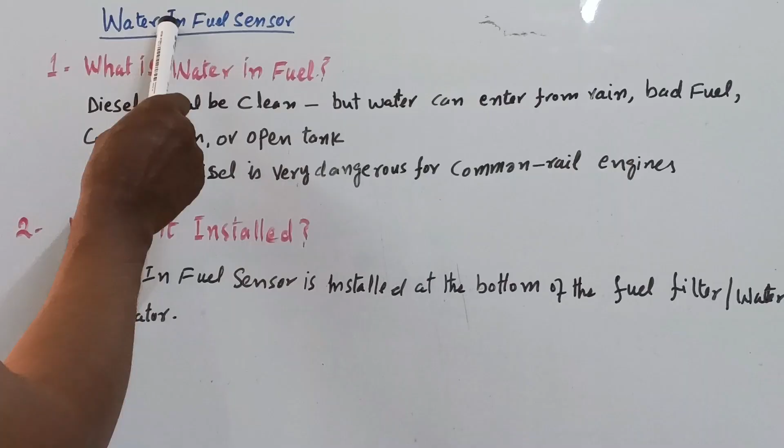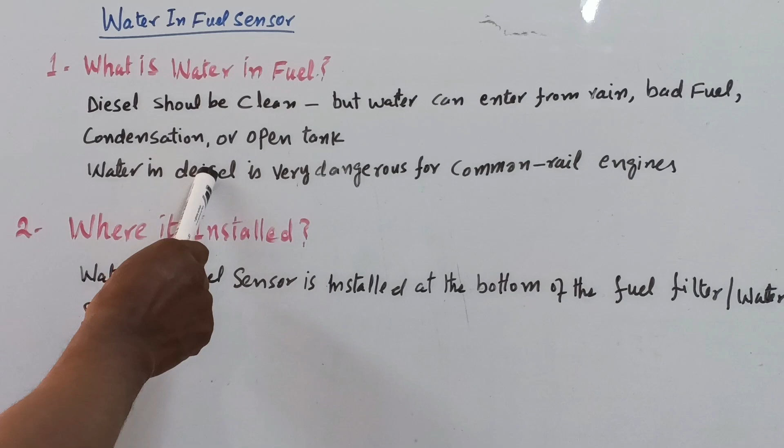So let's start. First we talk about the water in fuel sensor. So first point is what is water in fuel? Diesel should be clean, but water can enter from rain, bad fuel, condensation, or an open tank. Water in diesel is very dangerous for common rail engines.

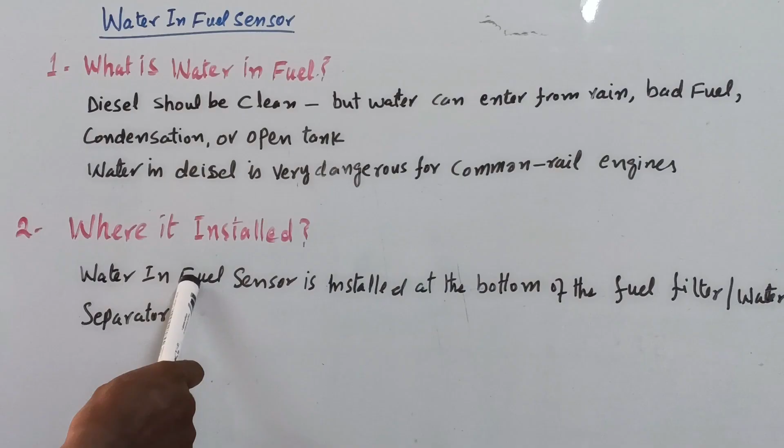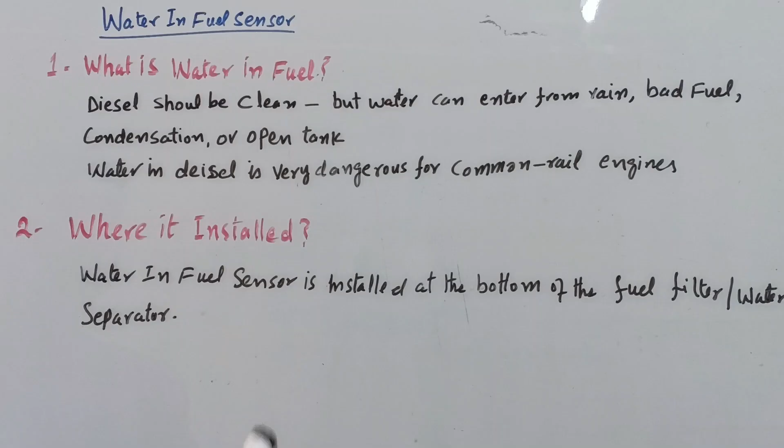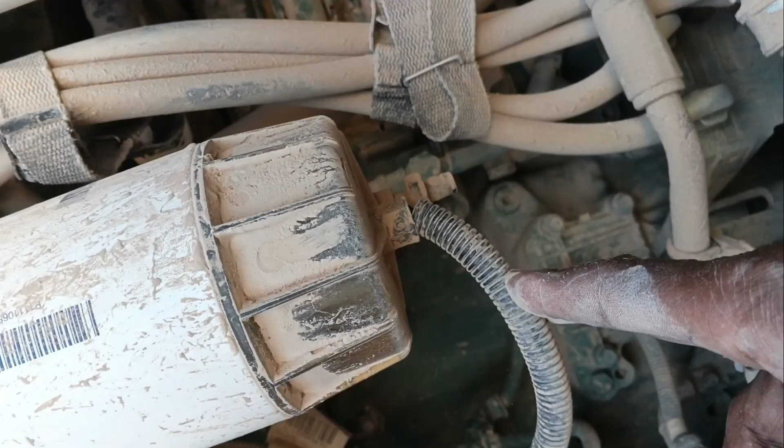Point 2. Where is the water in fuel sensor installed? The water in fuel sensor is installed at the bottom of the fuel filter or water separator. I'll show you physically on the machine where in the Volvo loader this sensor is installed. So here you can see this is our diesel filter, under this diesel filter is a water separator, and in the water separator our water in fuel sensor is installed.

Point 3. How does this sensor work? Diesel does not conduct electricity, water does conduct electricity. Therefore, when water reaches the sensor probes, the circuit is completed, the ECM detects it and the warning light comes on. So in this way, this sensor works.

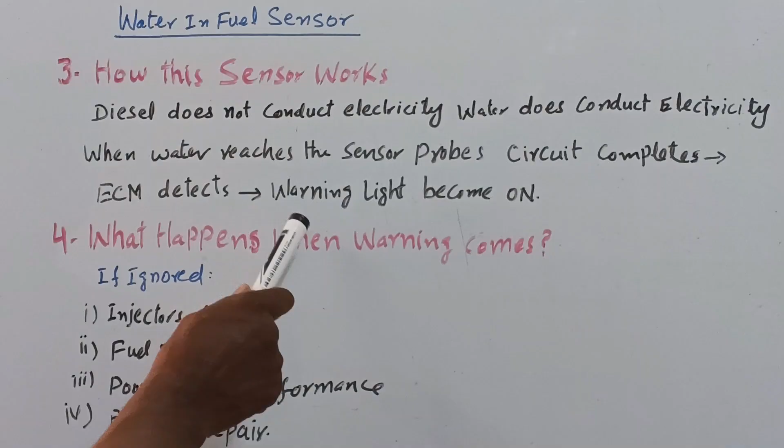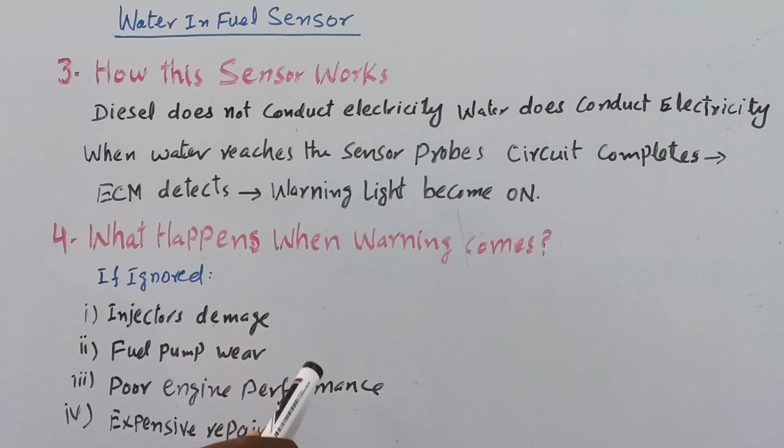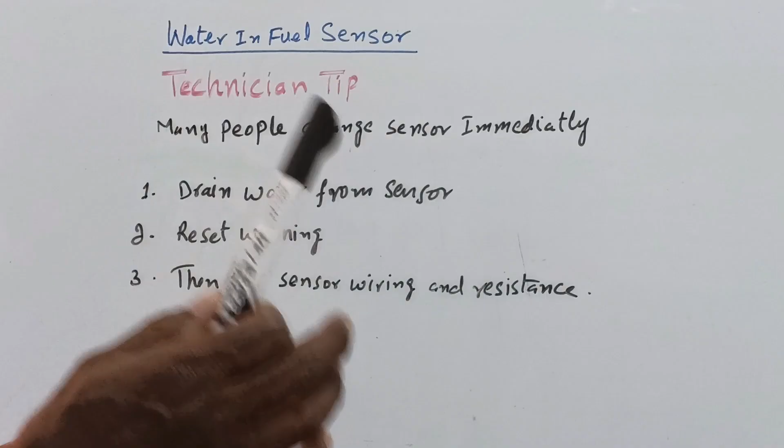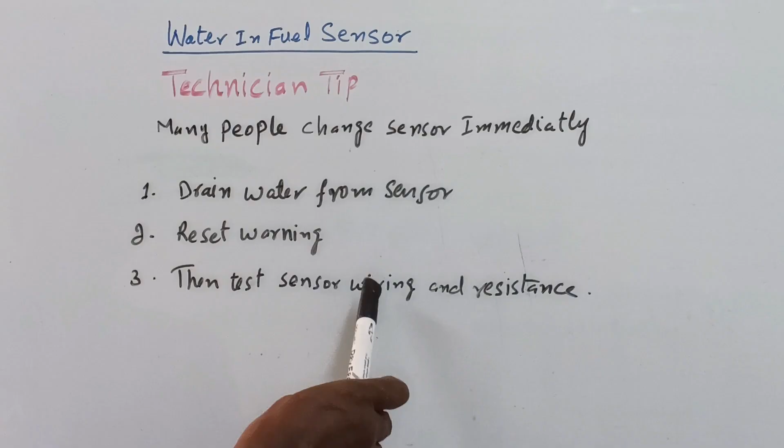Point 4, what happens when the warning light comes on and we ignore it? Number 1, injectors can be damaged, the fuel pump can wear, poor engine performance, and number 4, expensive repair. And at the last, a technician tip. Many people change the sensor immediately, but don't do this. First, you have to drain the water from the sensor, then reset the warning. If the warning is not resetting, then test the sensor wiring and the resistance.

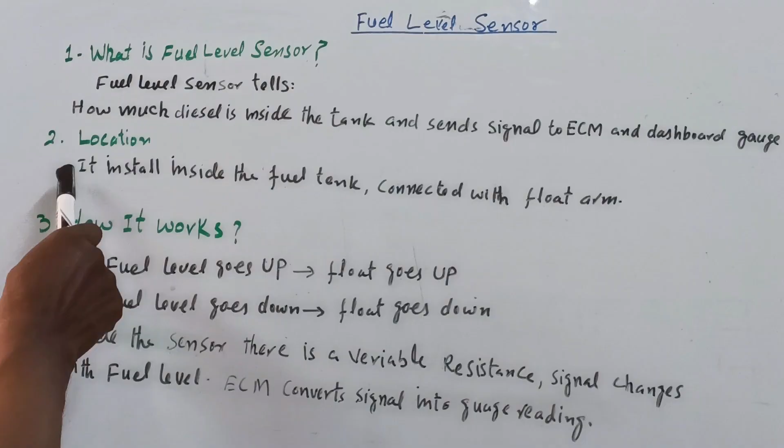So viewers, now we will talk about the fuel level sensor. So first, what is a fuel level sensor? The fuel level sensor tells how much diesel is inside the tank and sends a signal to the ECM and dashboard gauge. Number 2, the location where it is installed. It is installed inside the fuel tank, connected with the float arm.

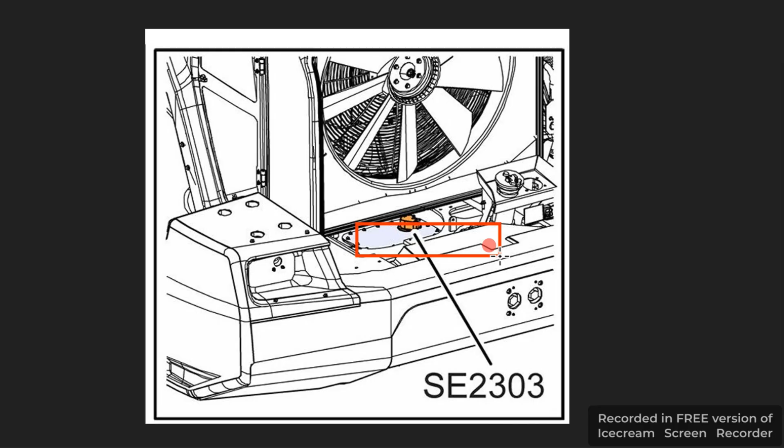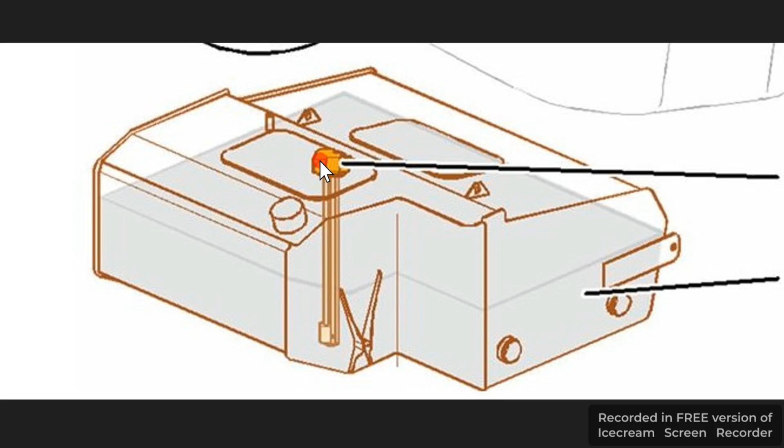I'll show you on the machine where this sensor is installed. So here you can see this is my machine, the backside of the machine, and this is my diesel tank. This area is the diesel tank, and the sensor is installed inside this tank. In this picture you can see this clearly. This is my diesel tank, and inside this tank is my fuel level sensor.

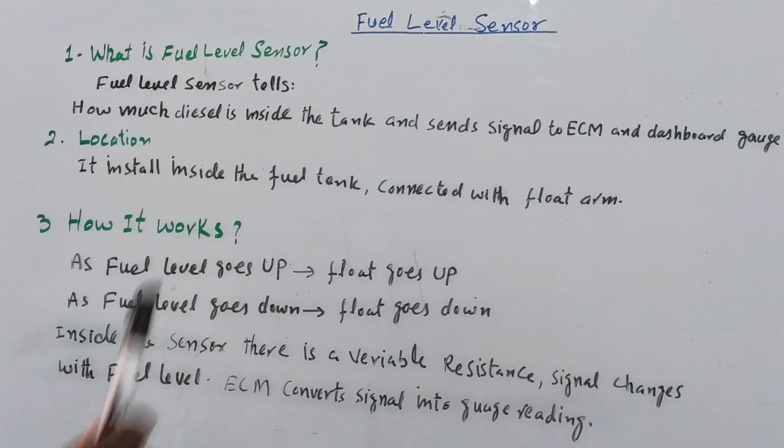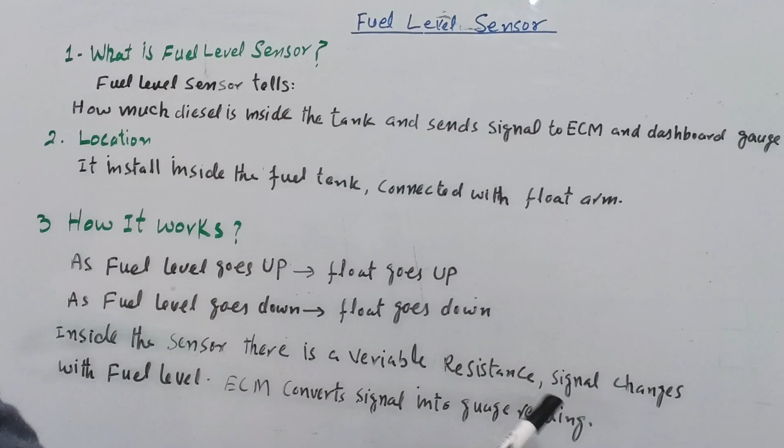Number 3, how does it work? As the fuel level goes up, the float goes up. As the fuel level goes down, the float goes down. Inside the sensor, there is a variable resistance. When fuel goes up or down, the signal changes with the fuel level. Then the ECM converts the signal into a gauge reading. So in this way, this sensor works.

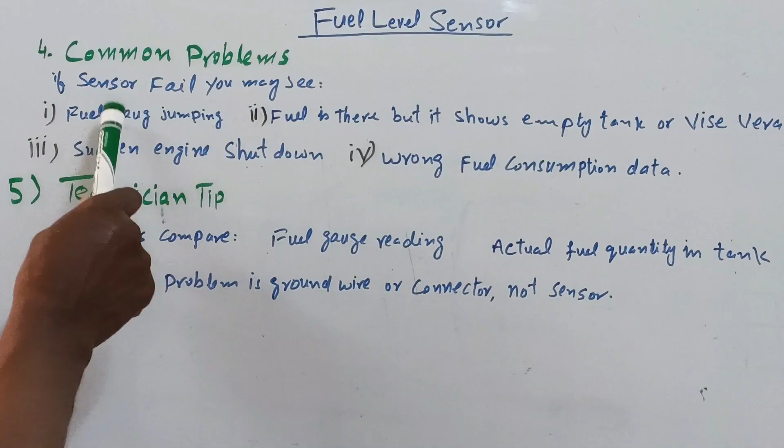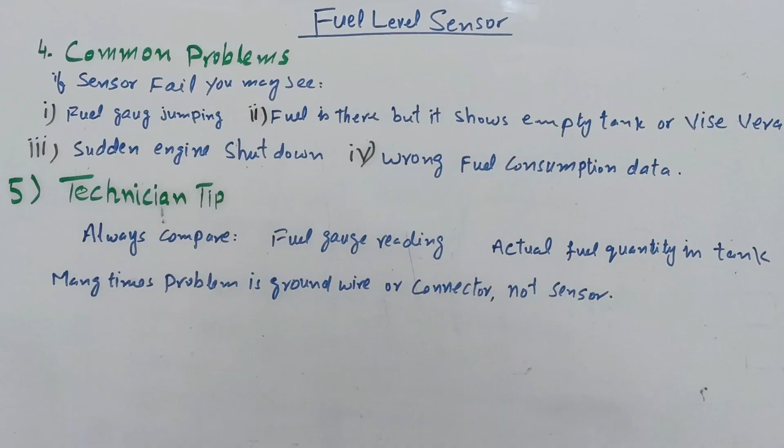Number 4 is common problems. If the sensor fails, you may see these types of problems. Fuel gauge jumping. Number 2, fuel is there but it shows an empty tank, or vice versa. Number 3, sudden engine shutdown. Number 4, wrong fuel consumption data. Number 5 is a technician tip. Always compare the fuel gauge reading with the actual fuel quantity in the tank. And most important, many times the problem is the ground wire or connector, not the sensor.

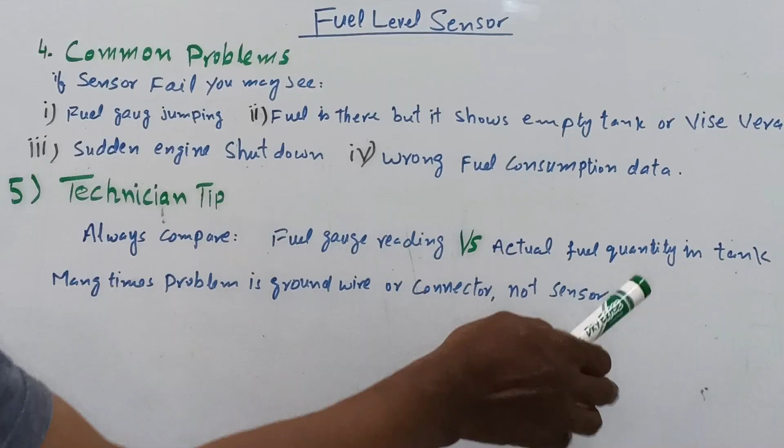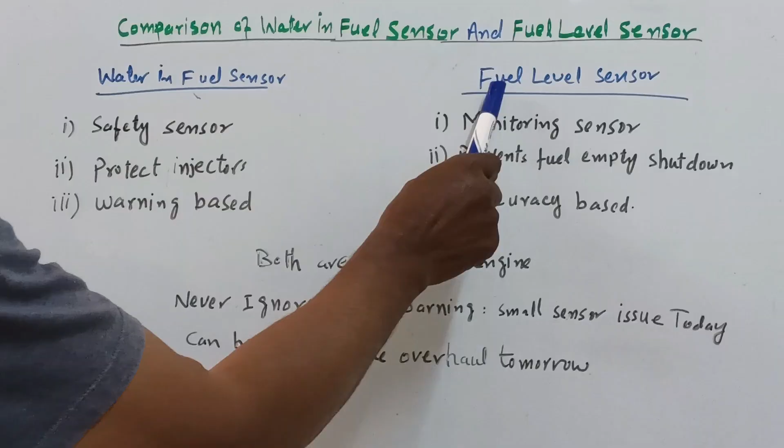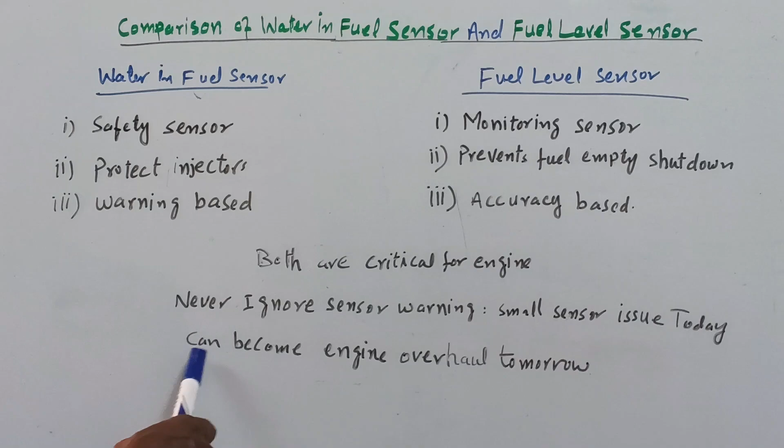So at the end, I will show you the comparison of the water in fuel sensor and the fuel level sensor. This is my water in fuel sensor, and this is my fuel level sensor. Number one, the water in fuel sensor is a safety sensor, and this is a monitoring sensor. This one protects injectors, and this one prevents fuel empty shutdown. Number three, this is warning based, and this is accuracy based. Both sensors are critical for the engine. Never ignore sensor warnings. A small sensor issue today can become an engine overhaul tomorrow.

So viewers, I hope you understand the importance of these sensors, how they work, and why we should not ignore the warnings of these sensors.